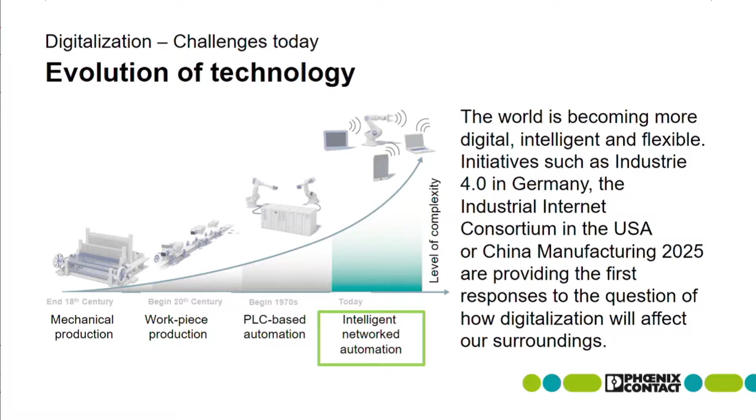Here in the US, you have the Industrial Internet Consortium - we'll come to that a little bit later. Maybe you've heard of China Manufacturing 2025. It's more or less the same as Industry 4.0. So there are many, many words all over the world. Each country nearly has its own name for it. It's not perfectly the same, but it all addresses digitalization.

So let's see how it affects us all. Of course this word Industry 4.0 means everything about production. But as we have heard the whole day, digitalization affects all our surroundings, our private lives. It's from infrastructure, energy systems, it's about machines and plants, power generation, whatever. I think this is something we have already understood today. Somehow everything will grow together with this digitalization.

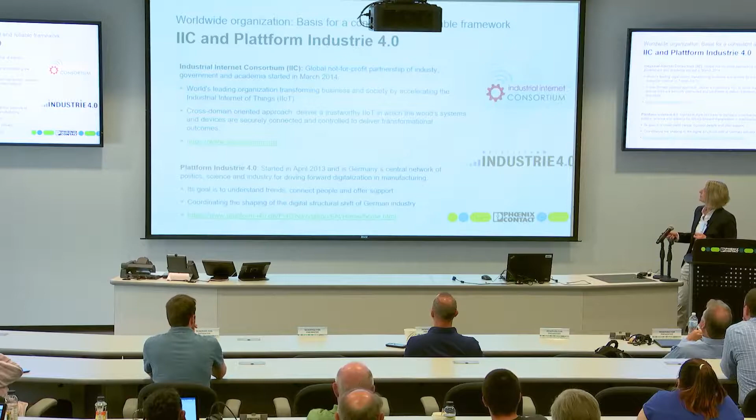But in the US, there is a different approach. It's more based on the Internet of Things idea, Internet of Things and services. So it's about a cross-domain oriented approach. In comparison, this platform Industry 4.0 really focuses on the trends in production, the digitalization in manufacturing. So it's not completely different, but two different points of view on this topic, digitalization.

And when it comes to worldwide communication, of course it's very important that we speak the same language, let's say. For me as a German speaker, it's not so easy to speak English all the time. And it's very important that our digital products, our cyber-physical systems, can speak the same language all over the world. It's not very easy, but it is done already.

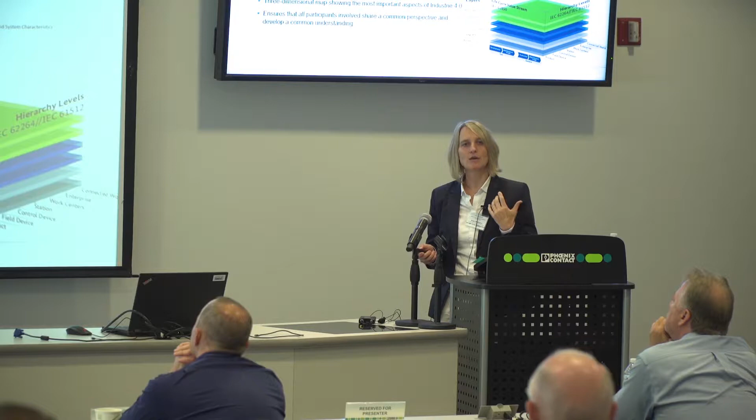In this industrial internet reference architecture, the model here from the IIC, you have standards for industrial Internet of Things. That means every company, every person who wants to create a cyber-physical system, wants to create software, wants to create a new product which is part of IoT, has the possibility to look into this model and understand where this product needs to communicate. So I, for example, know what communication basis is necessary for our power supply unit. It's a common architecture framework, necessary if you want to communicate in your IoT world.

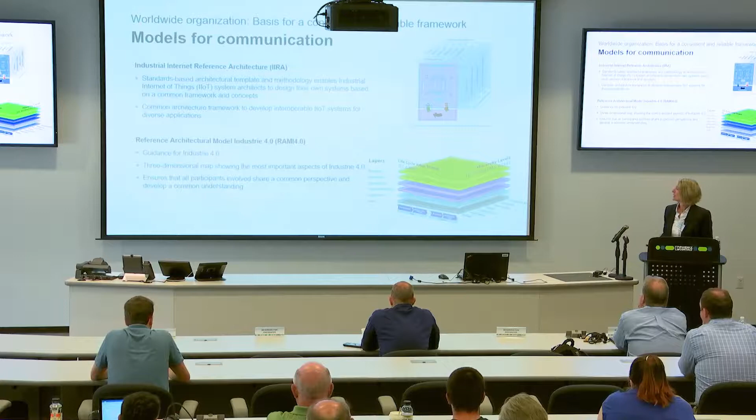Then there is a second model, we call it Reference Architectural Model Industrie 4.0, RAMI 4.0. This also offers guidance, but it's focused on industry, focused on production. So more or less it's the same idea behind it, a model for communication, but really only with focus on production.

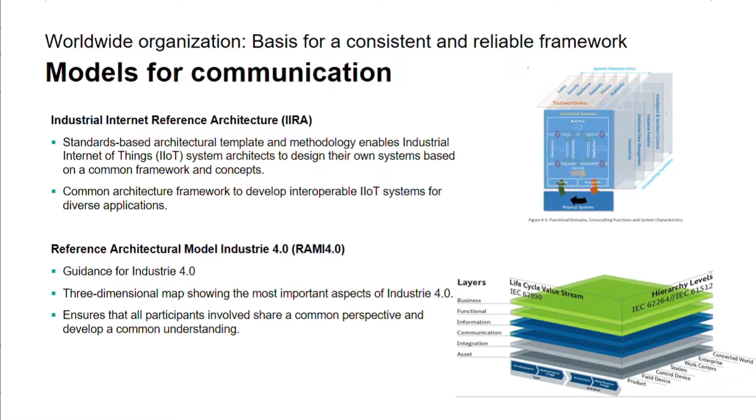In 2015, it was the first time both organizations sent people taking care of these models to talk to one another. First of all, they had to understand the idea of the other architecture model, what they wanted to achieve with it, and understand the perspective of why it was done like this. They worked for several years, and this year we see an ongoing approach for interoperability.

This year at Hannover Fair, they stood there together and talked about what they are doing and why, and where the advantages are for a company. They identified mappings, identified differences, and formulated all the requirements for what had to become easier. The big advantage is that you see here, this is the model for Industry 4.0.

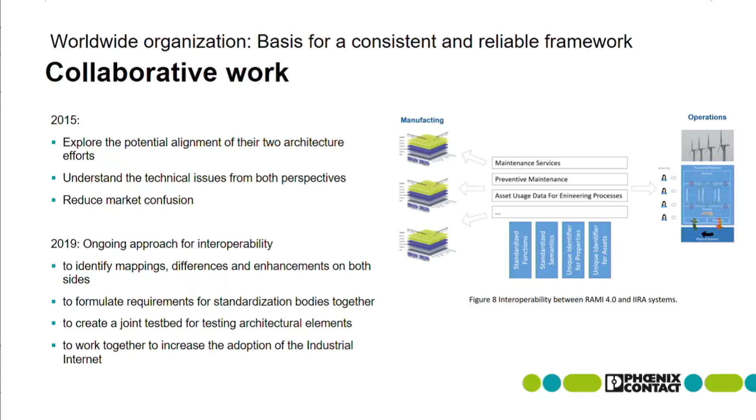This is the model for IoT communication. They found the possibility to exchange information. So where an IoT system needs information from the cabinet—imagine machine, cabinet, there are interfaces in there, power supply units, batteries in there—you need information from this cabinet out of this model, and you want to use it for preventive maintenance, for example. You need it in this communication model. So this is already done.

So today it is possible to connect these models, and it's clear for those people who do the programming how they can exchange information. A very important step into this worldwide communication. Otherwise it will not work, but that's not the future—this is already done and working.

For Phoenix Contact, it's very important to understand what is happening there and to work on standards, because all this structure in this German platform Industry 4.0 is meant to offer standards. Without any communication standard, there will be no global communication, of course. This is why we started pretty early to work in this German platform.

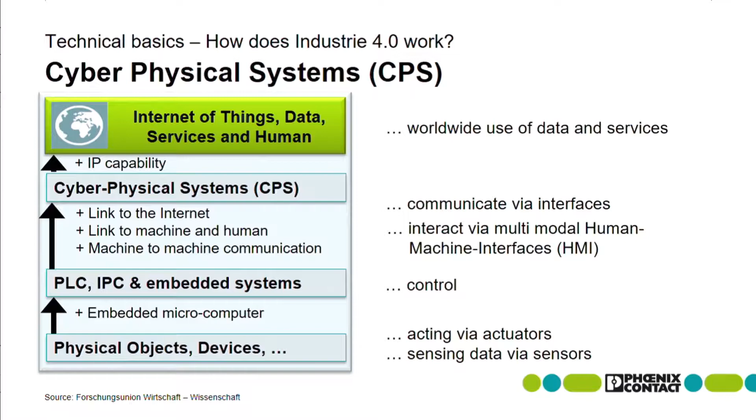We have heard of this cyber physical system. I want to talk a little bit about that because this is the basis you need to connect the physical world to the cyber world, to the virtual world. So we have heard today lots of things about connecting, getting data, integrating physical things into a system, and this must happen somehow. And this is where we find a cyber physical system.

A cyber physical system is a possibility to make a physical thing, like what I have here in my hand, become a virtual element. So cyber physical system always means I have one part which is physical and one part which is virtual. And when I have this virtual and physical world matched together, I need communication. And then I have a cyber physical system. So this is a little bit for understanding.

So I have physical objects in some way, like sensing data with sensors. I have actuators maybe. Then I add a little intelligence, so I have a control here - I'm on PLC level. And when I then add machine-to-machine communication, a link between machine and human being, and a link to the internet or some other kind of communication system, then I can communicate, I can interact. Then this is what I call a cyber physical system.

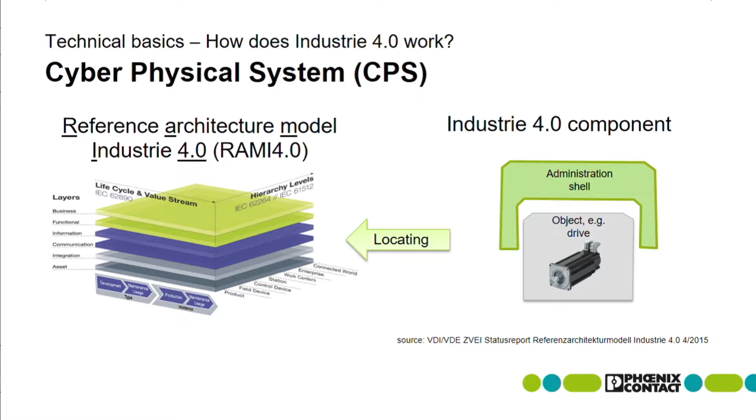So you can find it referenced in brochures and books as Industry 4.0 component. You find it as digital twin. You find it as cyber physical system. It means always the same: that I have an object, that I have a virtual part that describes the object, and this is somehow located here in this model for communication.

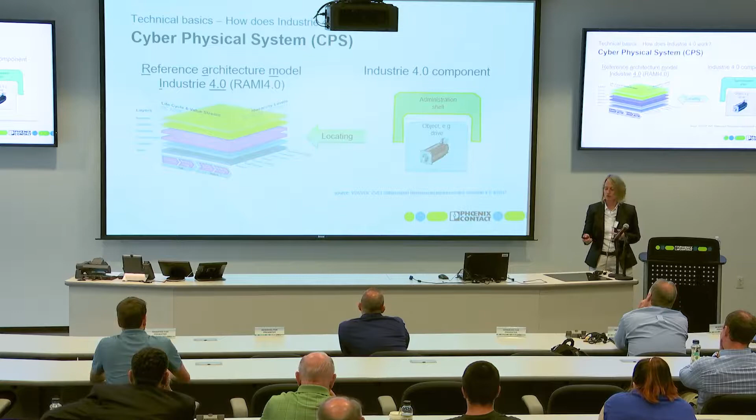You see here it's a three-dimension object, and I would like to show you what these three dimensions are about. So it's like a map, a three-dimensional map, which shows Industry 4.0 in a structured manner. So I can understand where I am, where a product is, and how this product can communicate to the internet, to a controller, to an SAP system, to a human being, whatever you like.

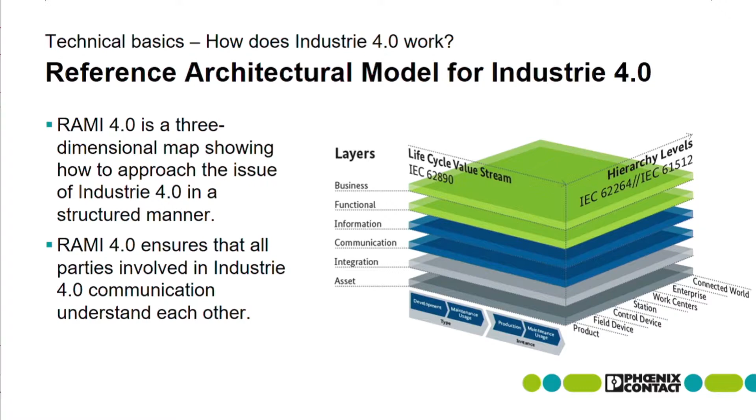It's necessary, of course, that with this model, this reference architecture model for Industry 4.0, all parties that are involved understand each other. Otherwise, it will not work, of course.

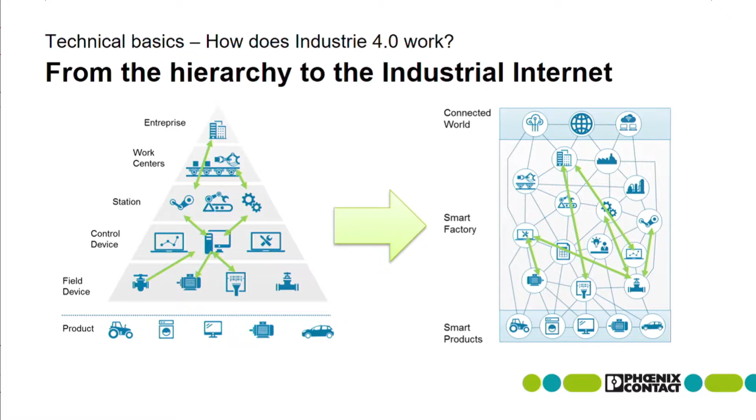So let's have a short look on this slide. You have seen this in the beginning also. Jack showed us this one to explain how communication will change. So most of you know this pyramid for communication that we use right now. And this is where we want to be - everything is intelligent in some way and everything can communicate in some way. But how does it work?

We know really how this works. For this pyramid structure, I know where my product is. It's isolated. But when I have information from a field device, I can communicate to the control device. I can give information, if necessary, up to the enterprise system, and, of course, all the way down if necessary. This is how we work today. So this is Industry 3.0.

With Industry 4.0, I'm much more flexible. So I can distribute functions throughout the network. So you have heard already about batteries - thousands of batteries become an energy storage which is needed, which is used when I need it. So this is also a hot topic here for Industry 4.0.

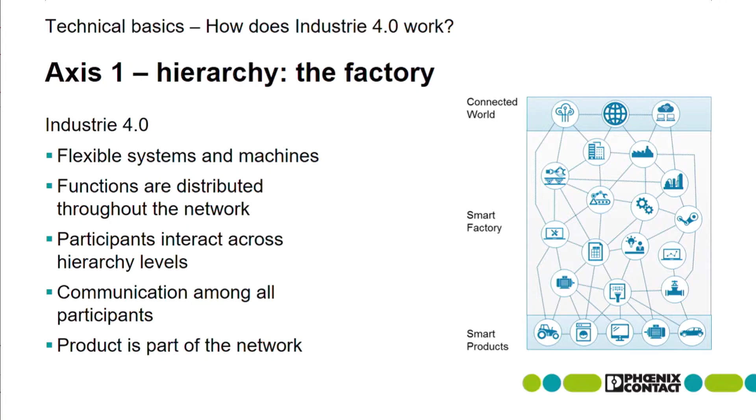Everyone can communicate with everyone, so it doesn't matter in which hierarchy level a product or controller or even an enterprise system is. Communication all over all participants, so really from a smart factory to smart products all over the world, everything is possible. And this is possible with this architecture also here. Here we have communication from business over asset, data, down to the physical object in the real world. This is one of the axes.

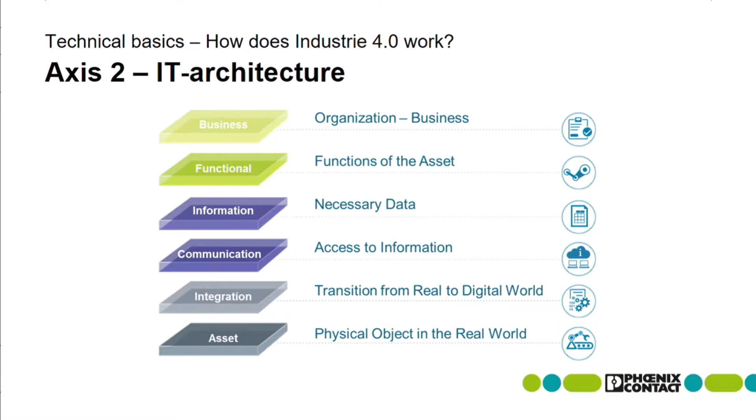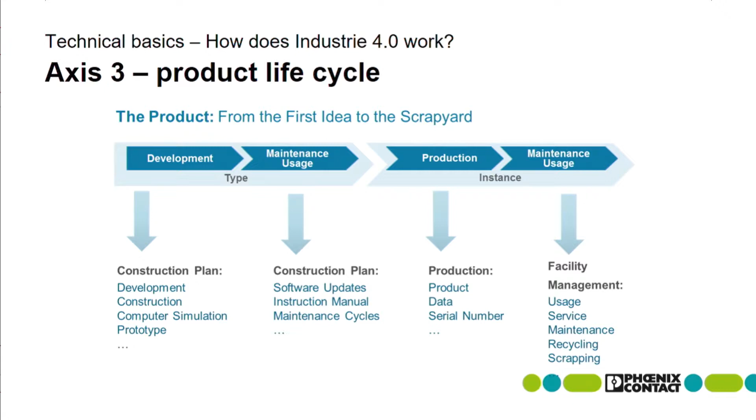First axis is what we have seen in this pyramid, this flexible pyramid that changes. Third axis is the product itself, because with Industry 4.0 I need to have the possibility to show the product life cycle. So life cycle for us at Phoenix Contact means someone is thinking of the product, designing it virtually. At the next step, I have the construction plan. Then I go to production itself, so the real hardware is produced. But at the end, there is service, maintenance, recycling maybe, or someday I throw it away. So from the first idea how a product may look like until I throw it away someday, I have the possibility in this communication model to locate my product, to get information, and to put information in my product again. So this is the communication model.

But the model for communication, of course, is not enough. I need the possibility that the product itself can communicate. It's always a funny question when it comes to products that are not intelligent. The question very often is, okay, I'm not responsible for Industry 4.0 because all my products have no computer integrated, no Ethernet communication, no USB stick. So Industry 4.0 doesn't matter to me. But that's wrong, because this is where the cyber-physical system comes into view.

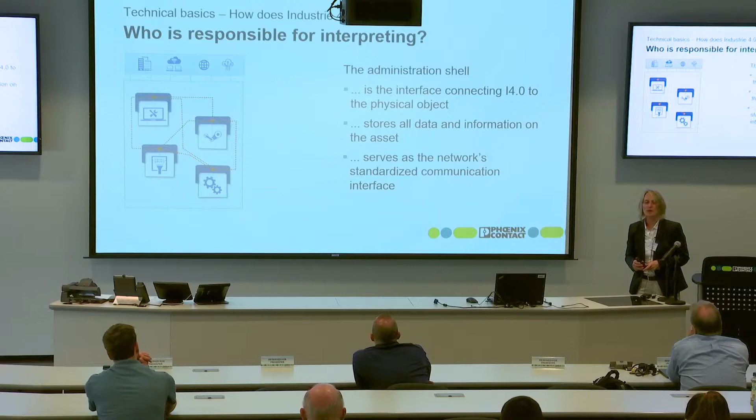If I have a terminal block, of course, the idea of Industry 4.0 is not to produce terminal blocks with some kind of Ethernet connection or whatever. Of course not. But I want the possibility that I can access this terminal block, for example.

Maybe I want to know where have I bought it? Is it from Phoenix Contact? Is it from another company? Maybe I open the cabinet and I want to get 10 more of these perfect terminal blocks, then I want to order it individually. Or if you think of interface modules or power supply units, I want to know how old are they, what is the article number, what was about test reports, is the product itself okay or not, whatever.

So I want access, and this access, or this communication, is done with this cyber-physical system, with this digital twin, or the word is also administration shell. I always prefer the word digital twin because I think it describes it a little bit better. The digital twin connects the physical and virtual world.

You see this picture again, this communication model, and this digital twin again. So this is the physical thing, and I have this digital twin available somewhere in the cloud, somewhere on the server. What I have to do is connect the physical object to this digital twin itself. This can be done, for example, with a QR code, with a serial number. So I need to identify my physical object, but that is enough. If I can identify it, I can communicate with it.

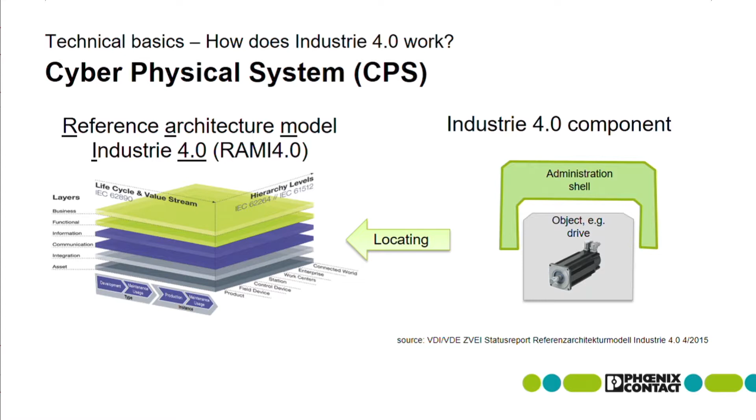I can collect data in this shell, and this is where all the advantages come from, because I know about a product. I have data storage for this product over the whole life cycle. And this is what is meant by life cycle. This picture shows us that information, that data of a product, is growing.

So if you think of a DNA of a product itself, it starts when, for example, we as Phoenix Contact buy something from a supplier, maybe plastic parts, diodes, resistors, whatever. So we start collecting information in this digital twin.

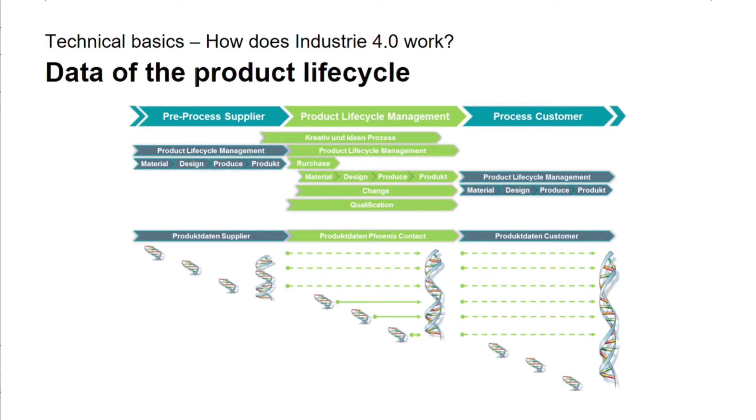Then we add everything what we do. What kind of material is it? How is it produced? Is there a firmware on this product? We add all this information to this digital twin, so I have everything stored in this digital data storage. And then at this point, our product is finished.

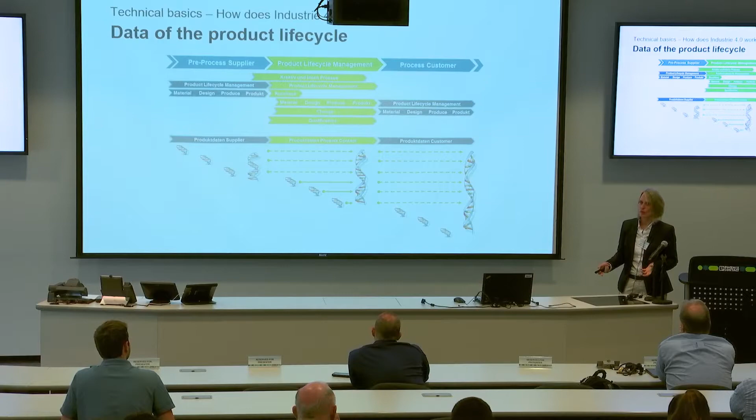So we now sell it to our customer, for example, the terminal block or the power supply. And then the customer takes also this digital twin and lets it grow also. So he can put information in, okay, it's cabinet number 25 where I now integrated this power supply. I want to sell it to my own customer. Then it goes to, I don't know, it's shipped to China and it's integrated in a bigger application somewhere. This is all information I can add here.

Here you see what we at Phoenix Contact do for this digital twin. So first of all we put things in it, like data sheet, order numbers, 3D models, engineering information. When I start producing it, it gets the serial number, special product information. This is all data that is stored in this digital twin.

Additionally, I have this digital twin available for information during the process. So it's not only fixed, static data that you see here, but I also see data in this digital twin when it comes to usage. For example, if I have an interface module, I get information about data out of the interface module. Or if I have a switch, I can count in this digital twin how often this switch is going on and off, or a relay module. So all this dynamic data out of an operation is also available now here in this digital twin.

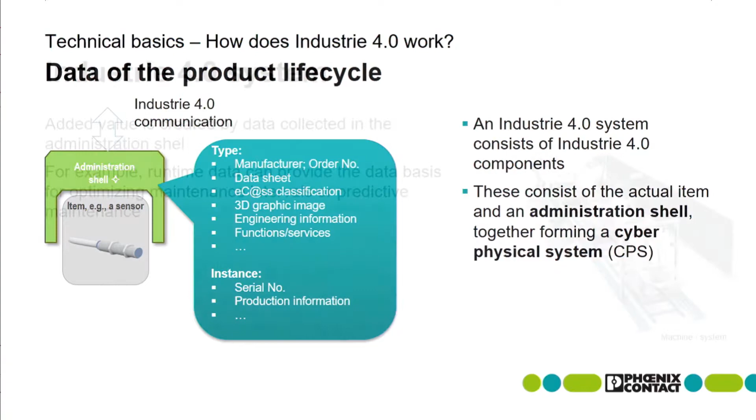And this is where we focus on when it comes to earning money, because when I have all this information here, I can access it and use this data for artificial intelligence, for predictive maintenance, whatever I may think of. This really depends on the application itself, but I have everything I need from the data available in this digital twin. So with these cyber-physical systems, I have lots of possibilities that were not available a few years ago.

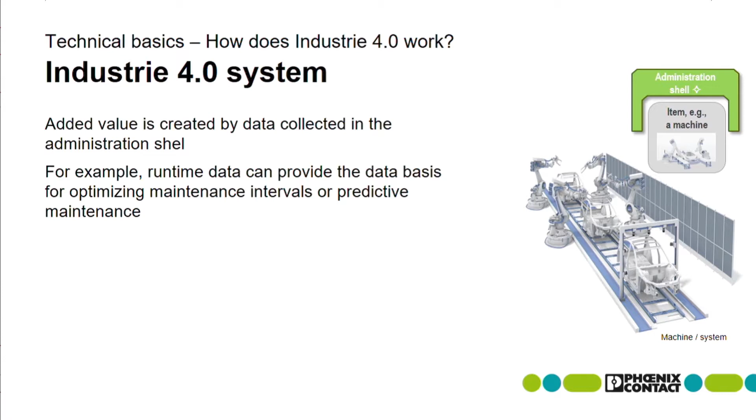It's a little bit - let's say the standard for the digital twin is not fixed yet. I told you that RAMI is fixed, OPC UA is fixed, but the digital twin itself, how it really looks like, what kind of data has to be integrated in this digital twin.

There's no worldwide standard available right now. They are working on it, and at the Hannover Fair this year, they told us they are pretty close to having a standard, but we as Phoenix Contact have the experience that we want to start a little bit earlier, because it's a very complex topic, and if you wait until a standardization paper is available, and then you start your work with the digital twin, it's a little bit too late. We think it's important to know how these communication standards are working, and we know about that because we are in the Platform Industry 4.0.

And with this knowledge, we started to build up our own Phoenix Contact digital twins. We use them in our production lines, for example. At the moment, we do not make them available to the public. Of course, if you call, our sales guys have the possibility to access the digital twin. Next step may be that when you log into the eShop, you can look online into your digital twins.

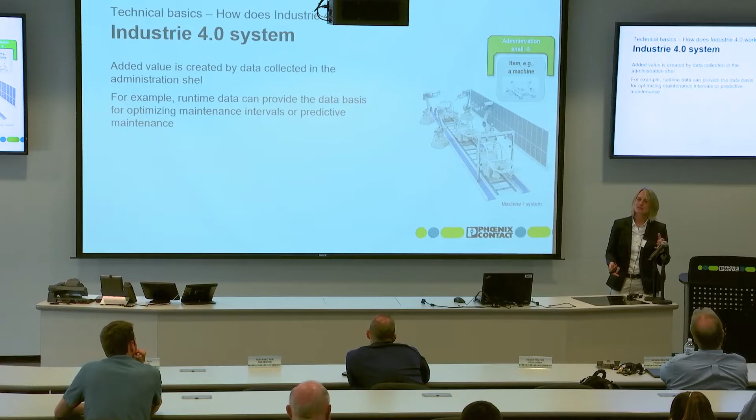So what you have bought, you can see also as a digital twin there. Is it an idea for maybe earning money? So it's not defined what you will pay for, or if the digital twin is something you will get when you buy a Phoenix Contact product. Another thing is who owns the data. So when we offer you a digital twin, it's mainly our information that we offer you.

But when you take over the twin and fill it with your information, then of course it's your information. But it's not clarified right now who owns the data, who earns the money with the data. So there we have to wait a little bit, see how it happens. But we started already, because for us we think it's very important to have the data available. So we have the databases available.

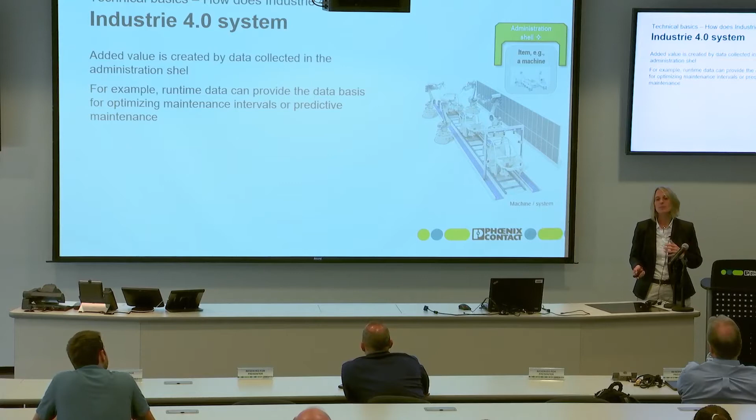We know what is happening in the cabinet. So we are building the products, we know about the product itself, about the hardware, and if we know about the process, what the hardware is doing in the process, we are able to do, for example, predictive maintenance. So that is a hot topic for us at the moment. For example, in our own production lines, we want to know about a motor which is getting slower before it stands still. So this is the point we are working on.

But I told you that I have an example from building IoT. I think it's important to understand Industry 4.0 is about production, yes, but the ideas behind digital twin and communication standards are the same for all other applications also. So today I think it's interesting for you to have a look into building IoT and what we do there. I hope this will give you ideas of what is possible if you use a digital twin of a product, a building, or a combined heat and power unit, for example.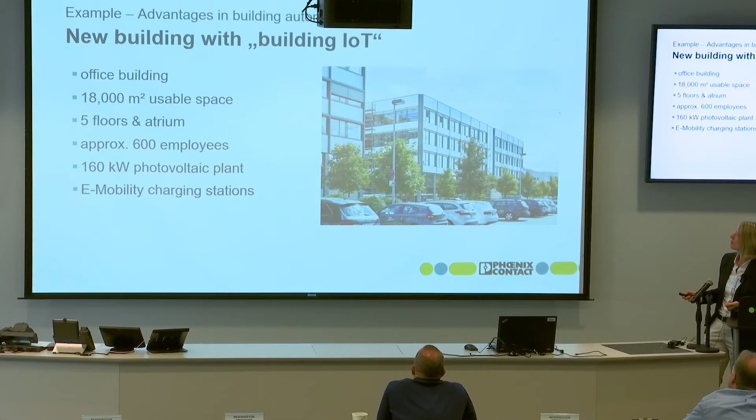I'll go into detail with this newest building. This is the office building. It's around 18,000 square meters on 5 floors, and nearly 600 employees working in this facility. On the roof is a 160 kilowatt photovoltaic plant, and as I already mentioned, we offer some charging stations there.

Most of all, we started with understanding what is available there, so everything we have on one system. You see here a colleague, he has it on an iPad. So you have access to this information when you have the address and you are a Phoenix Contact employee. You can access this online software from your computer. We have screens in the facility itself, so you always have access to all of this information. It's a web-based system, and our colleagues from facility management connected really all devices.

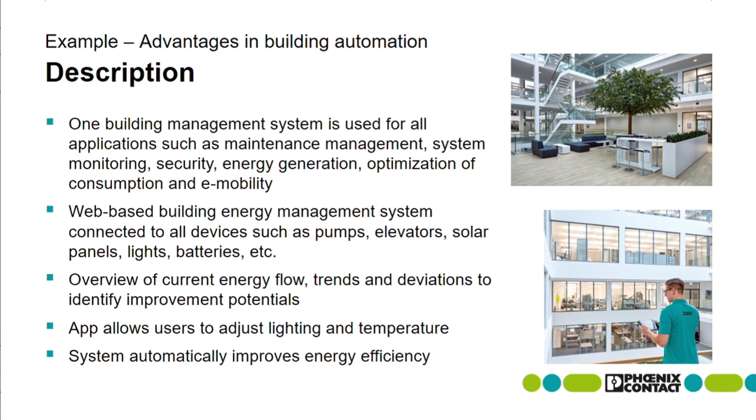So when we started this new building, it was said that we only buy parts for this building that are able to communicate. So if there's a part that can only communicate with a closed system, which is not open, and we cannot access the system with our controller, we won't buy it. That was the main focus when we started building up this building. So each pump, elevator, solar panel, lights, everything that is integrated there can communicate on an open communication model.

So with this, we have a good overview. We know about energy, we know about trends, what is happening. So we can use this to identify what can be improved. There is, for example, an app, very nice for us working there. You have an app, you enter a room, and with your mobile you can change the light, you can handle the temperature in the room, for example - so it makes us very flexible.

The system automatically improves energy efficiency. With this system, we are able to cut everything that costs really money. We use different kinds of energy optimization—we produce our own energy, and most of all we buy energy. With this optimization software, we reduce costs because we have no peak loads anymore. So we can handle the whole Bad Pyrmont facility very energy efficiently.

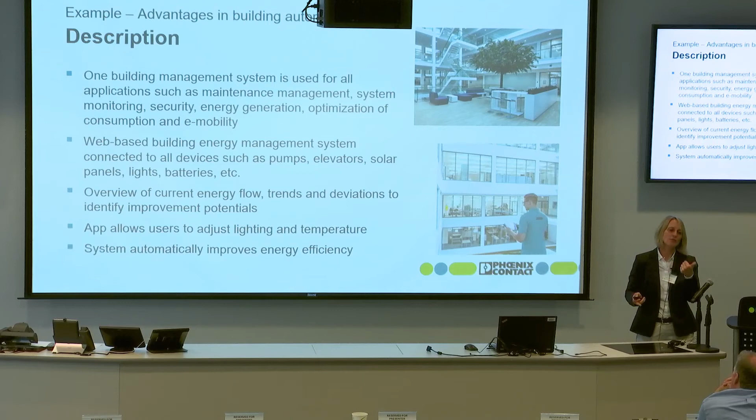Just to give you an example, we have 2 elevators in the middle of the new building, and there's one point where you can order an elevator. You cannot order elevator 1 or 2 specifically—the controller of the elevator sends whichever one it prefers. No one knows why elevator 1 or 2 is coming; it's done by the controller from the elevator company. No one took care about that.

But when we had the data from the elevators, we counted them and found out that one elevator is coming twice as often as the other. For me as a user, it's not important—I don't care if I take the left or the right one. But it's important when it comes to maintenance, because we have a maintenance interval for each elevator, and of course we have to pay for it. We want the maintenance people to come only once.

So we detected there is a big difference. For us it costs money because the maintenance guy comes twice, and now we can level this. Our controller takes over and sends the right elevator so that maintenance can be done for both elevators at one time. Of course these are only 2 elevators—we have more, but these 2 are already connected to this IoT building system.